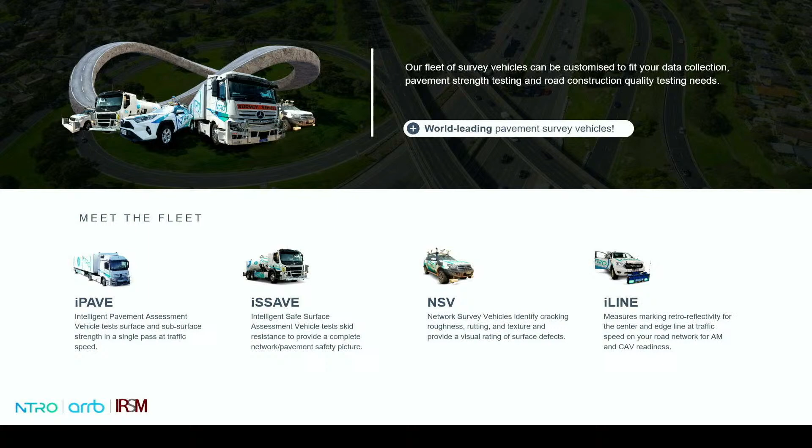The technological advancements that we have in Australia mentioned here today are the iPave, the iSSAVE, the NSV, and the iLine. I'm sure you've seen this dashboard earlier from my colleague's presentation, but we are able to provide our data in a way that is usable to the end user, however you need it processed.

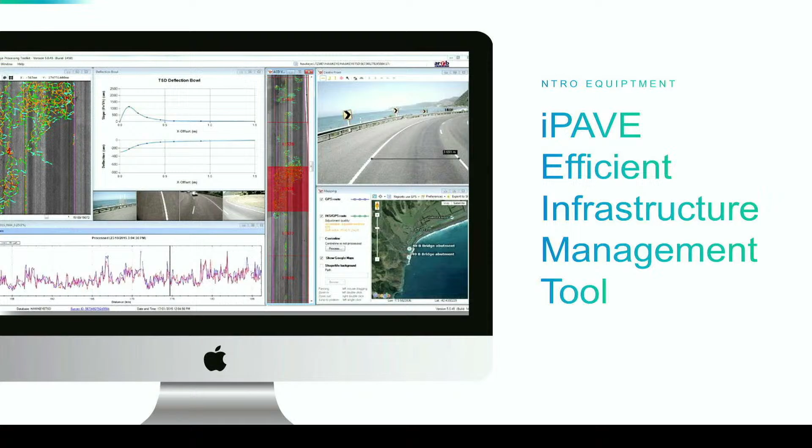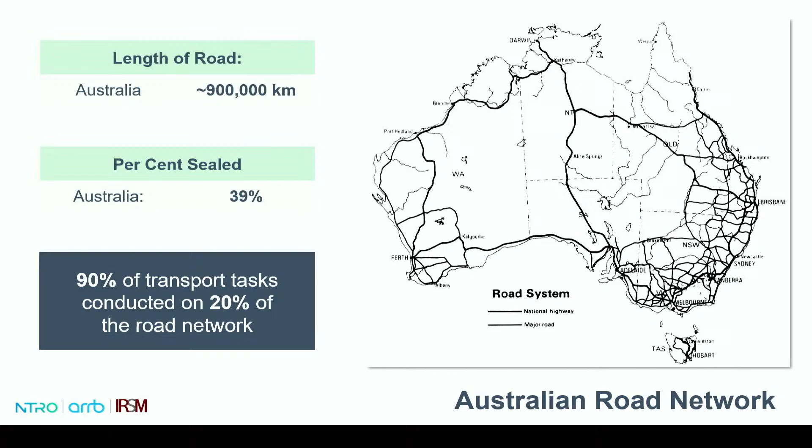The point of this case study is about right treatment, right place, and right time, because that is how you save money ultimately. There's no point applying a treatment that isn't needed or at the wrong place. So what does this all mean?

This is a case study from the Victorian floods in October 2022. This was a 1-in-200-year flooding event. I know it rains a lot more here in India, but it doesn't rain that often in Australia. This flooding event occurred in inner city Melbourne and the northern regions of Victoria. It was reported that over 500 homes were inundated, and the Victorian State Emergency Services issued over 169 major flood warnings from the 12th to the 17th of October.

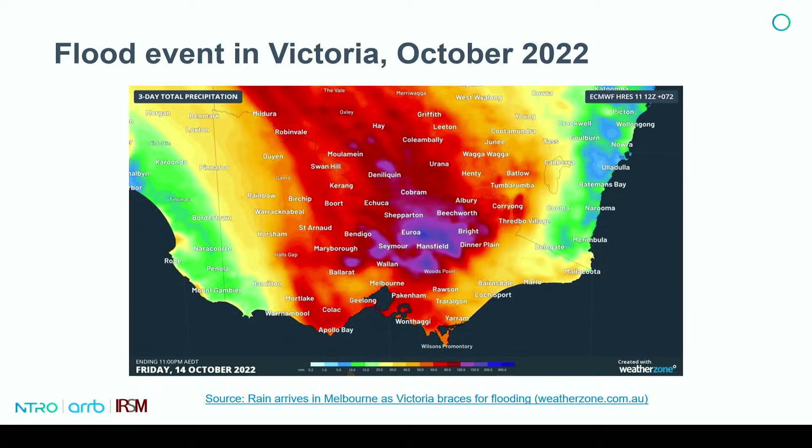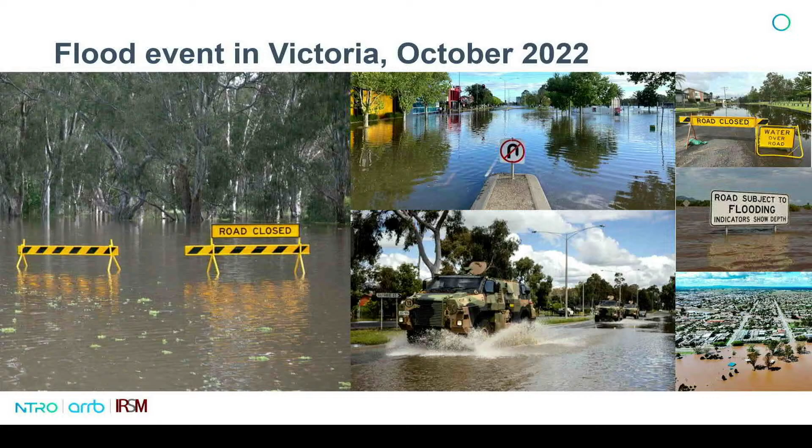This is what it looked like in Victoria, and we're not used to this amount of rain. This is what had happened to our roads and our networks. Once the water receded, this is the condition of our roads and our bridges.

Now, we did have road agencies carry out an audit of their state-managed roads, prioritizing the motorways and areas of critical safety for maintenance repair crews. However, that is only a temporary fix, because we have to wait until drier conditions before we are able to repair our roads.

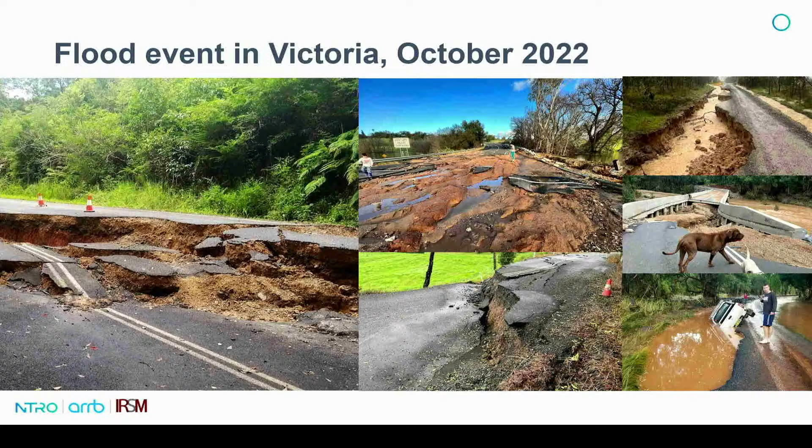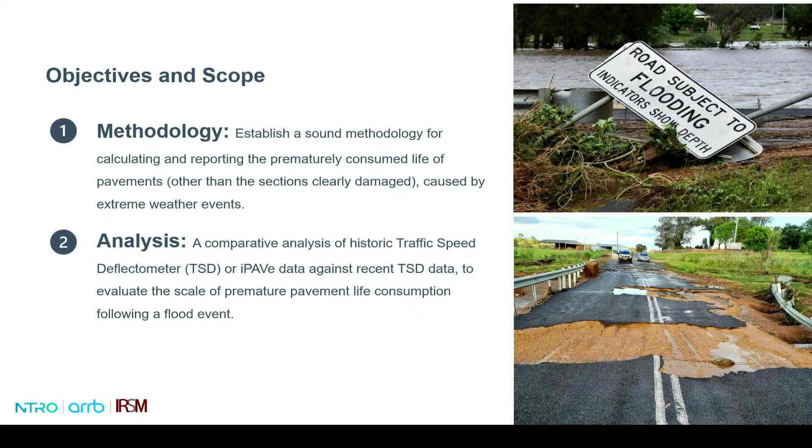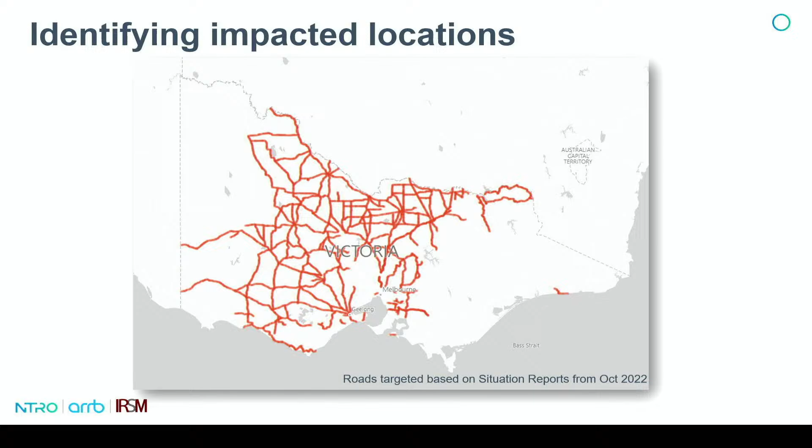The reason NTRO was asked to survey is that in 2021 we had already surveyed their network once, and in 2022, prior to the floods, we had also surveyed their network. Since then, the floods had happened, and in 2023 we were asked to resurvey.

What you can see here in the graph is that in 2021 the Victorian government provided $1 billion worth of maintenance, and they were able to increase their network from 2% good condition roads to 16%. However, after this flood event, they lost all of that, meaning there was a lack of resilience in the network.

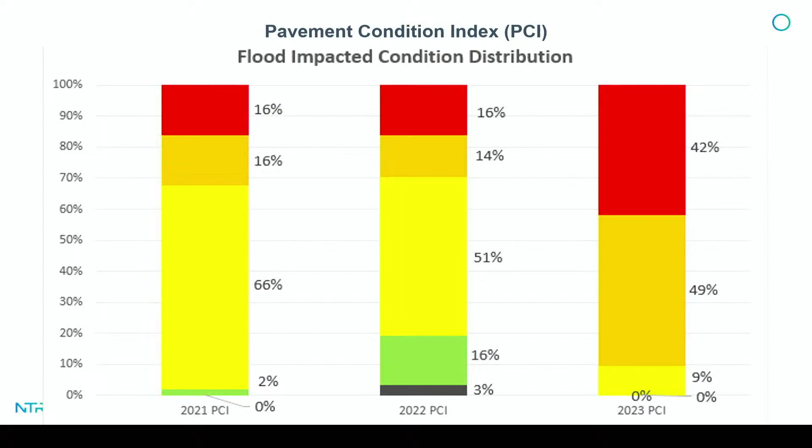So what did that mean? We were able to give them an assessment that indicated significant reductions in the remaining life. We analysed over 8,500 kilometres of road and matched 7,400 against previously tested data, then flagged 1,180 kilometres as deteriorated. That meant the cost for pavement intervention works was $291 million, and they were then able to request that from the federal government.

Another project we do with embracing big data is the Black Spur in Victoria. This is a very lovely picturesque drive that I've done many times myself, and as you can see, there are a lot of trees along the sides of the roads. Similar to some images we've seen today, these trees along the shoulders are nicknamed killer trees, because if you were to make impact with one, the tree will probably survive but you will not, and neither will your car. These are some of the incidents that have happened.

Again, using our survey methods, we are able to identify which trees are unsafe to have along the shoulders, and from there the road asset managers are able to remove those trees, making that road safer.

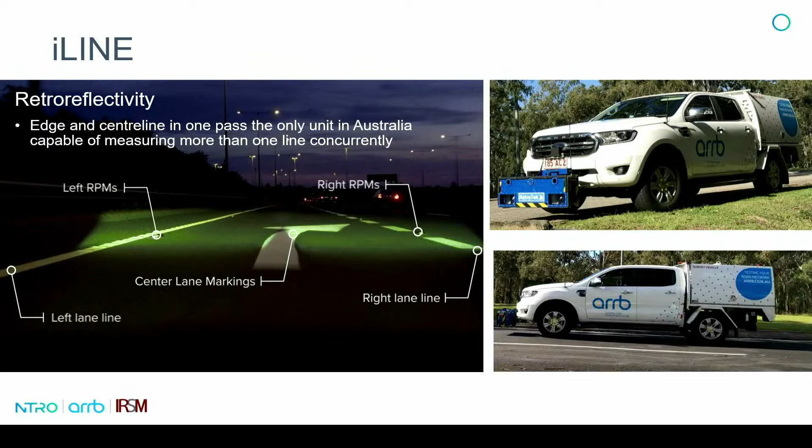We also wrote the guide from Austroads for harmonizing pavement markings and the national pavement marking specifications. We have a device called the iLINE that measures the retroreflectivity of these lines, which means state roads are able to only repair or remark areas that require markings.

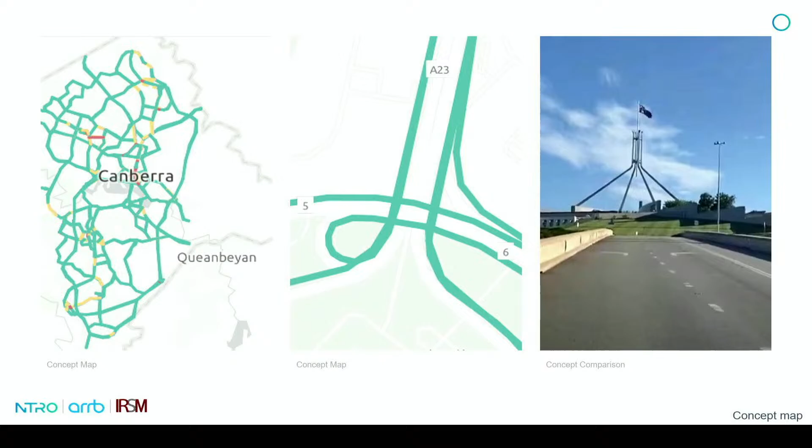But why all this data? It comes down to stacking that data. We've got a few platforms that NTRO offer, applying your safety data. If you notice a road that has lots of incidents and accidents, you're able to go into our other systems and compare that with the road condition, and ask why there are many accidents happening in that space.

From there you're able to see whether intervention is required, whether different maintenance is needed, whether we need to add a shoulder or change the line marking, and why these accidents are happening. This is why we need good quality data, to ensure that we are applying the right treatment, at the right time, in the right place.

One of the big reasons we are doing that in Australia is connected and automated transport. The future is coming, and through CCAT, another sub-brand of ours, line marking is really important for connected and autonomous vehicles. Without the lines, they can't drive themselves.

I know it is a little different here in India. I'm not quite sure how an autonomous vehicle will drive itself here - I'm afraid to drive here myself. But without line markings, autonomous vehicles are unable to drive themselves. They use LiDAR and need the retroreflectivity of the lines to be able to drive around, and if you don't have that, these cars aren't going to work. I know this isn't quite ready here in India yet, and I'm seeing a few smiles in the crowd who know I could not envision a robo-taxi driving around in India.

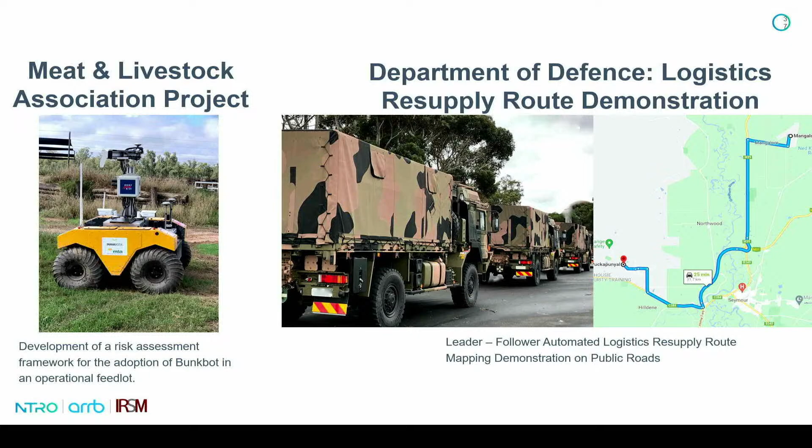The reason we are really pushing this agenda is for the successful transition into the future. I cannot stress enough how this investment into policy and how our roads are managed is incredibly important. We need good data, good governance to move forward, and to ensure, ignoring the connected and automated space, that our roads are safe, well managed, and that driving is a pleasurable experience. I'm sure everyone doesn't want to have to avoid a pothole every time they drive. It's already crazy enough here in India.

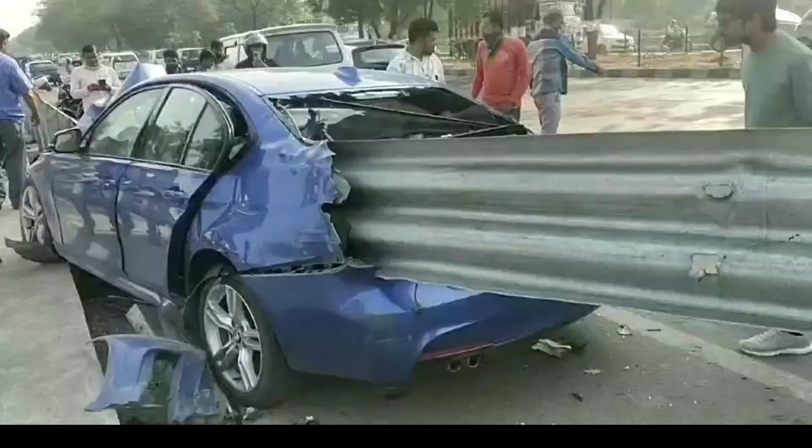That's a crash that took place in Tamil Nadu at an uncontrolled junction with side roads. There's another one where the crash barrier has gone into the vehicle.

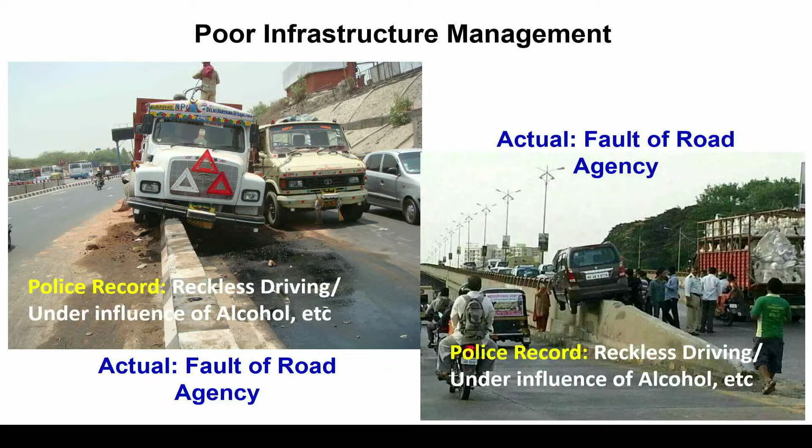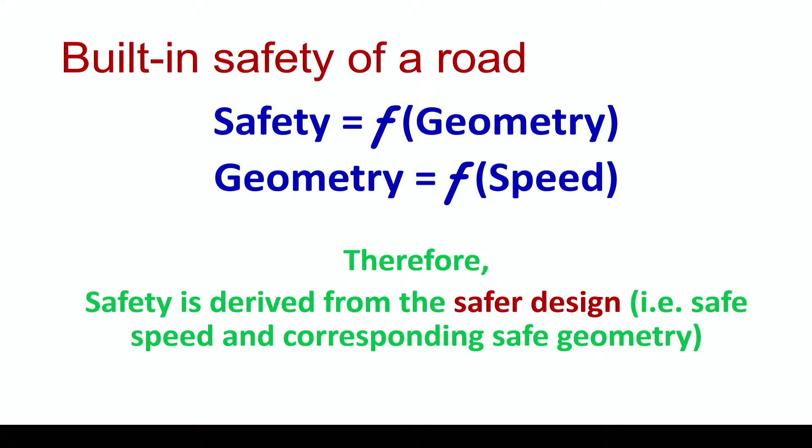There has to be infrastructure to compel drivers to reduce speed while going through the junction—raised intersection or other speed management devices should be put in, which were not there. So built-in safety of a road comes from geometry. It's a function of geometry, and geometry is a function of speed, we all know about that. So safety is to be derived from safe design; then only will it be safe. Otherwise, no safety.

Road safety experts and highway design engineers must understand one very important thing: safety can be built into the highway or road only if he or she understands that road safety is a blend of art and science. It is science because we have to use scientific principles to design the road—the super elevation, curve radius, everything based on science. And it is art because he must anticipate, he should understand how the road user is going to use this facility, what he is going to design. Unless he understands how road users are likely to use his design, he will make mistakes—he will make something, and people will make nonsense out of it. That's the problem.

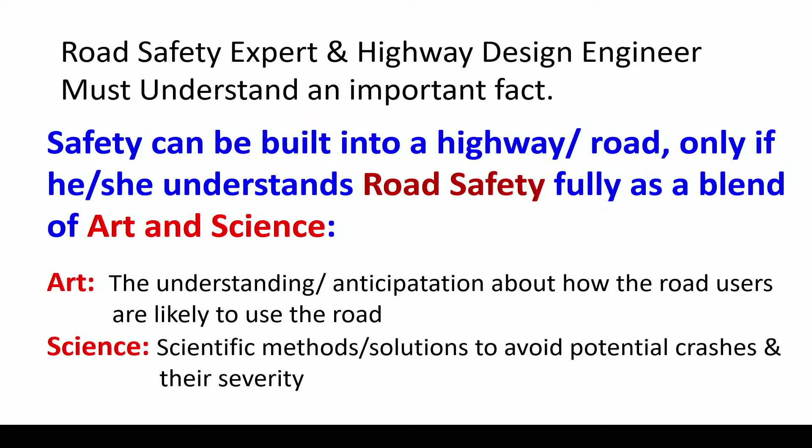Therefore, safety in design is to be provided by self-explaining roads, forgiving roadsides, by selecting the most desirable design standards which will be safe for road users, not by adopting minimum standards. All the standards and guidelines are the minimum that is required; safety requires more than that.

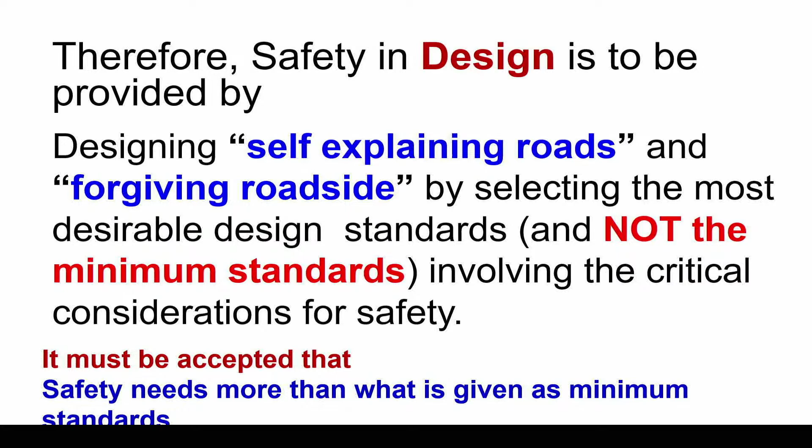Safety is not satisfied by this minimum requirement. It demands more than that. So we'll have to design it with all that. It must be accepted that safety needs more than what is given in the design standards.

Safe road infrastructure is to be designed safe. Firstly, safety engineering principles are to be adopted fully, considering what extra is required for safety. And then it should be audited during the development stages. All stages it is to be audited, not just an eye-wash audit by so-called auditors. It should be a truthful audit, fulfilling the objective and implementing the audit recommendations. Then only it will get to safety.

To be built as well as maintained safe. Not that we build only safe roads. Unless we maintain, it will be unsafe. It has to be maintained safe as well. And the existing facilities are used in an unsafe way only because they are not designed safe. It invites unsafe use. They are forced to use it in an unsafe way, or they are provoked to use it in an unsafe way, another way to say it.

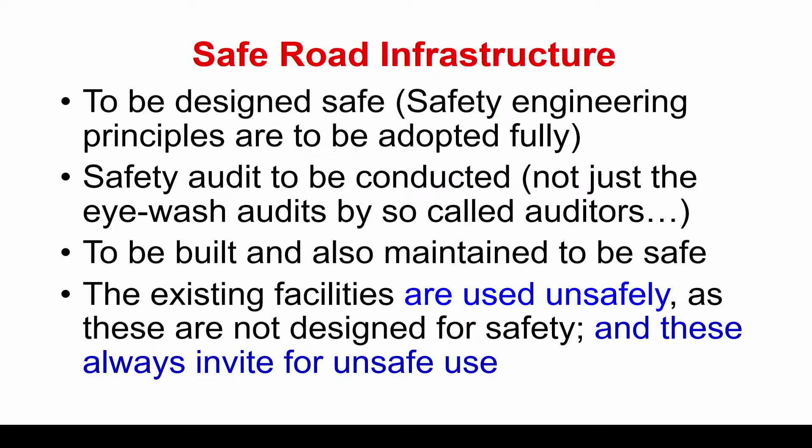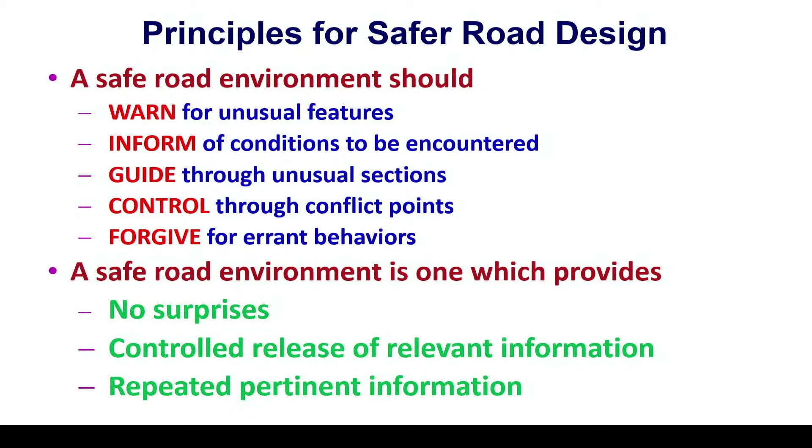Principles of safer road design, we all know. We have to warn, inform, guide, control, forgive. All that is known to all of us, and we must not leave any surprise for him. It must be told in advance, you are coming to a curve, you are approaching a junction. Everything must be told to him in advance. No surprise should be kept for him.

Reasons for poor safety in the road network are there. Design deficiencies surely. Poor road user behavior is another big question. And third is also weak enforcement. Of course, there are others which I have not listed here. The consequences are actually visible through our crash data year after year.

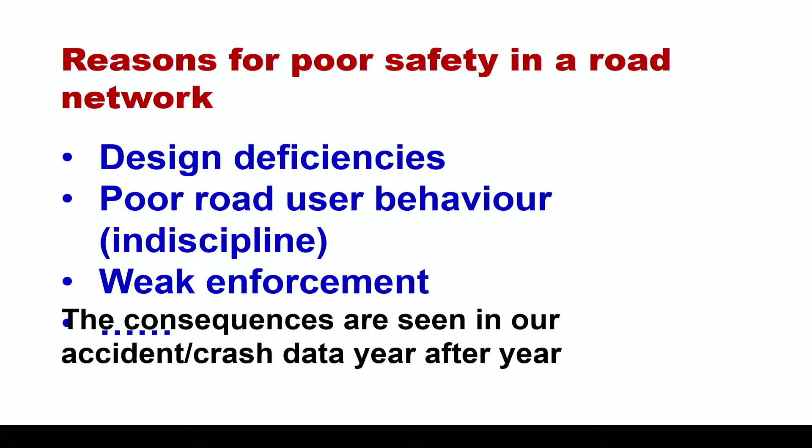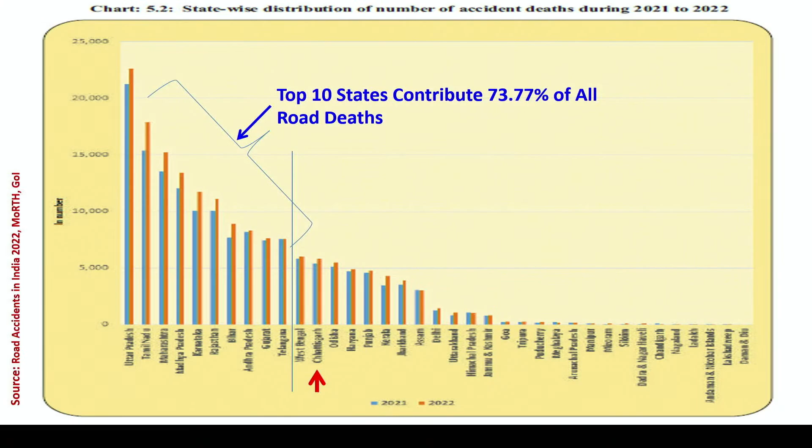The top 10 states who are really bad in road safety constitute 73, 74% of fatalities in the country. If we declare war on road safety in these 10 states, we will get relief by 74%. That's what is required. We are sitting in Chhattisgarh today, and that's what the arrow shows, the story of Chhattisgarh, which is not behind these 10. It's pretty close to the 10 states.

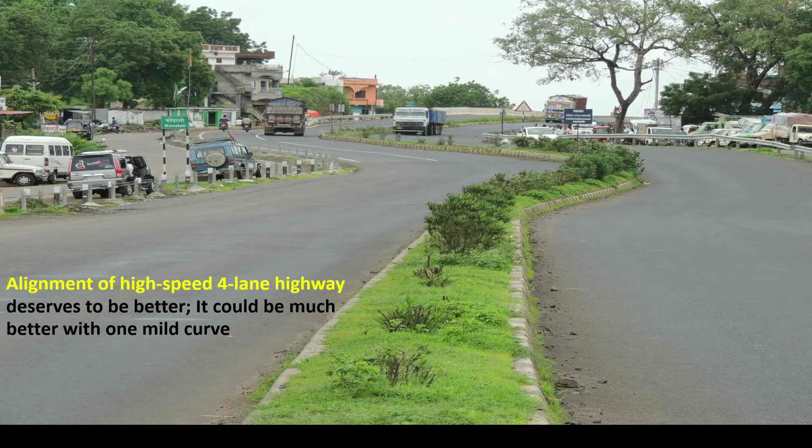Here is a 4-lane divided road. At the top there is a major bridge, and from there the road is coming down. How can a 4-lane road with 100 km/h design speed be designed like this?

My God, the huge number of people crossing a 4-lane, 5-lane road on one side. On the other side, again they will have to cross this many lanes. There is no overpass, no underpass. This is a serious, serious problem.

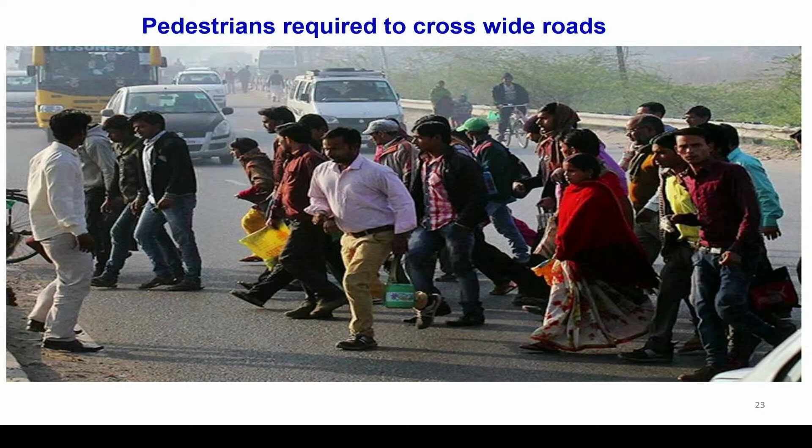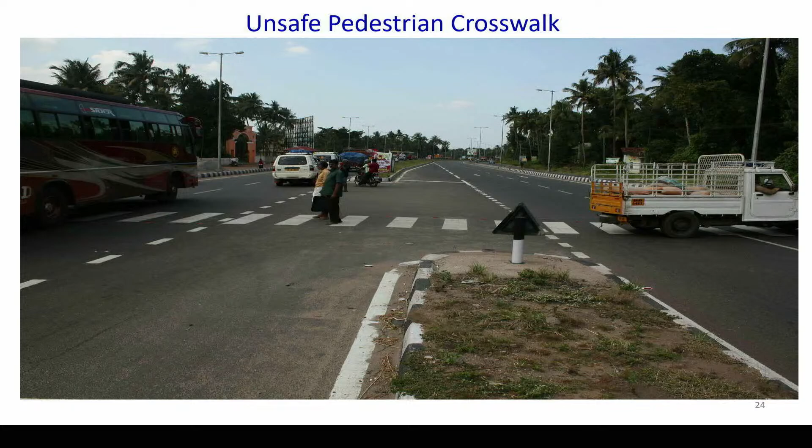Why the vulnerable road user percentage was 77%, you can understand from this figure. Look at this. Whoever painted it, painted in the middle of the junction. The pedestrian crosswalk is not painted there. It has to be here to give them the pedestrian refuge.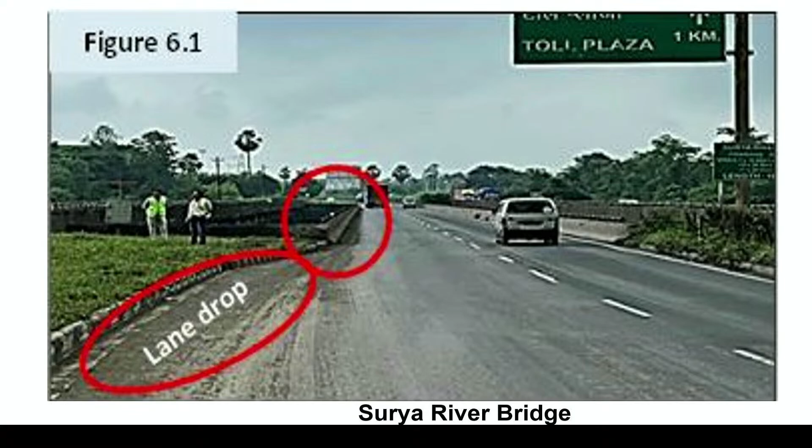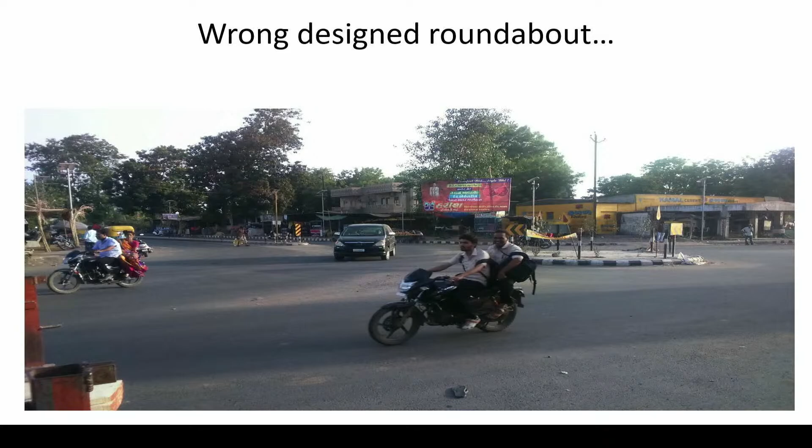This location is known to many of you, Surya River Bridge, the place where Cyrus Mistry met with an accident. Look at this roundabout, we are inviting him to go like that. Unless you design it right, he will make it easy for him, and that's what he's making. Look at this sign, where are the 6 lanes? I don't find 6 lanes.

That's not right. And above all these, there is road user behavior. I'll show you only a couple of examples. Look at this, 7 people on one motorcycle, and only one has a headgear. My God, they made it a 2-tier vehicle. Look at this, a horrible situation on a two-wheeler.

We can continue with these examples till tomorrow morning if you are ready through the night.

The Global Road Safety Facility said beautifully: money is going to be spent whether roads are built safe or not. If you make safe roads, it will cost more money. If you don't make safe roads, you will pay through the nose through accidents. India loses more than 10 lakh crore rupees every year through road crashes. Many development programs are deprived by this loss. We should always build safe roads.

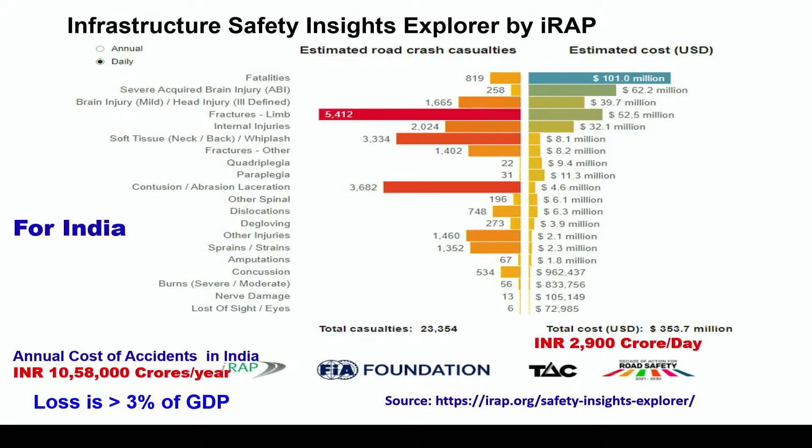National highways, state highways, and expressways account for two-thirds of all crashes and fatalities. There is a serious equity issue in road safety, as more than three-fourths of all casualties from road crashes are vulnerable road users. WHO said that life and health cannot be exchanged for any other benefits. We may say we are providing them mobility and accessibility, but by giving that, you cannot take their lives. That's not permitted.

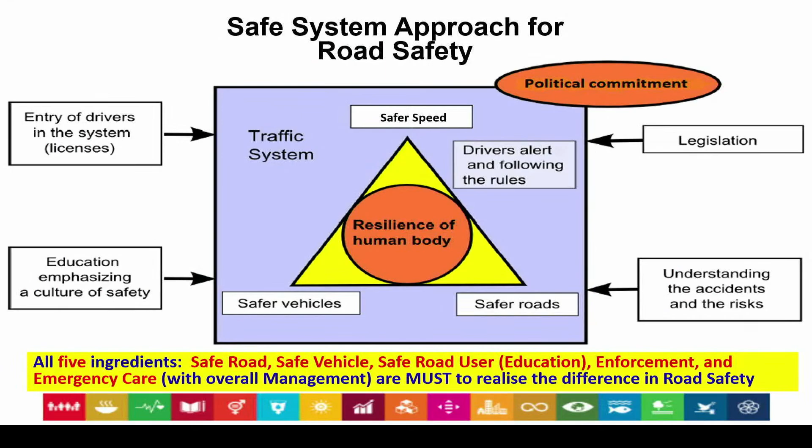For systematically improving road safety, we will need a safe systems approach. Without safe systems, nothing will happen. That's the safe systems approach. Most of you probably know, so I'll not go through that. That's another way to show the safe systems approach.

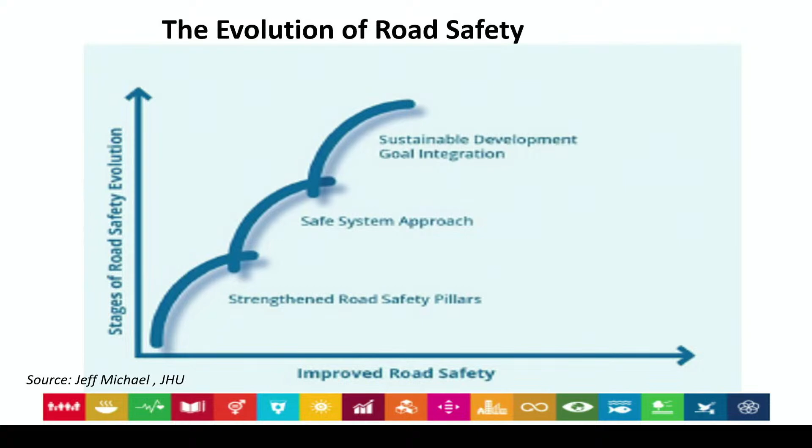Now, this is very interesting. Johns Hopkins University did research on the evolution of road safety, and they said that to have the safe systems approach, you will have to strengthen the road safety pillars first. You should have road safety management capacity. Without that, you cannot go to safe systems approach. These 5 E's are required, and only then will you get road safety.

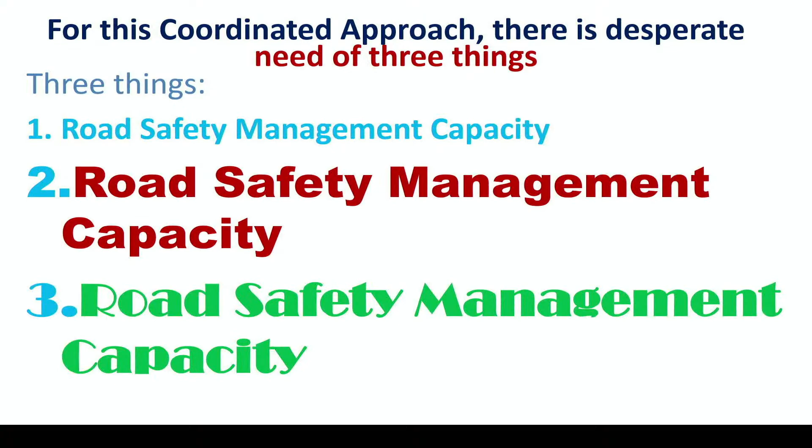Together, they will provide it. That's why for a coordinated approach, there is desperate need of 3 things. First, road safety management capacity. Second, bigger road safety management capacity. And third, even bigger road safety management capacity is required.

Why is road safety not improving in India? A road safety board was recommended by the Sundar Committee in 2007-08. It is not implemented till date. Cabinet has already approved it, but it should be like a separate ministry with a separate budget line, with independent budget. Everything for road safety is to be handled by that board in a coordinated way, including emergency response. Not that road design will be one thing and emergency response something else. They have to do it in a coordinated way, and only then.

So like that, everything else is there. There is no result-oriented program till date because this coordinating body is not there. There are many other reasons listed here. There is a road safety action plan which is to be implemented, but probably very few are interested in that.

This is a situation: an elderly couple died on the Yamuna Expressway, a 160-kilometer long expressway from Delhi to Agra. Two people died, one survived with major injuries. Hundreds of such accidents occur. This is an accident at night time where a truck is parked on the lane itself of the expressway, and a motor vehicle, a car, hit it, went inside it, below it, and 2 people died, one survived.

Now, hundreds of such accidents occur all over the country, day after day, for several years. Nothing has changed till date. My suggestion: exemplary punishment is required for offenders. Only then will it change.

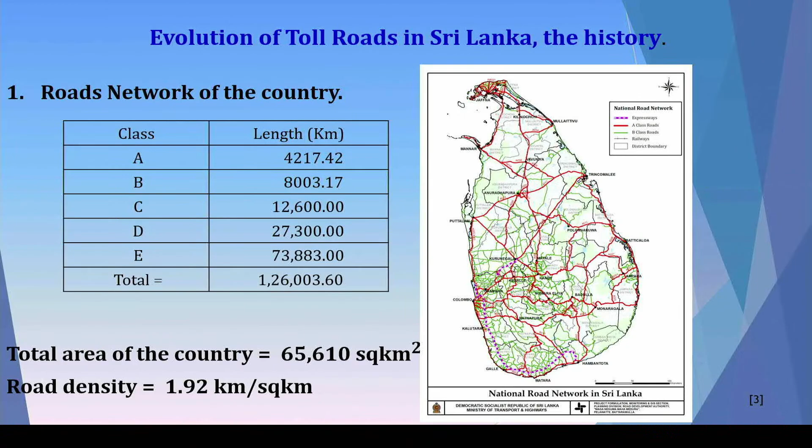The main design philosophy of the transport planning was to keep Colombo as the center and to design the roads, the expressways, radially outward from the center of the capital.

So coming back to the main point, the E03 was the one expressway about 27 kilometers. Why did we select that one? That's the only expressway that connects Colombo and the international airport.

So we selected that expressway, and initially it was MTC, meaning it had a manual toll collection method - very obvious. Then we did a calculation, and we recognized that unless we had at least one electronic gate by 2014, the manual gate wouldn't be able to cater to the traffic demand, and it would create unnecessary queue lengths.

The design calculation, though I didn't include it here - those slides I skipped - I am summarizing. So eventually, in June 2015, we decided to introduce one electronic gate to each and every plaza, keeping the others manual. One electronic gate is able to cater for 1,110 vehicles per hour, while in our manual experience it was around 290 vehicles per hour.

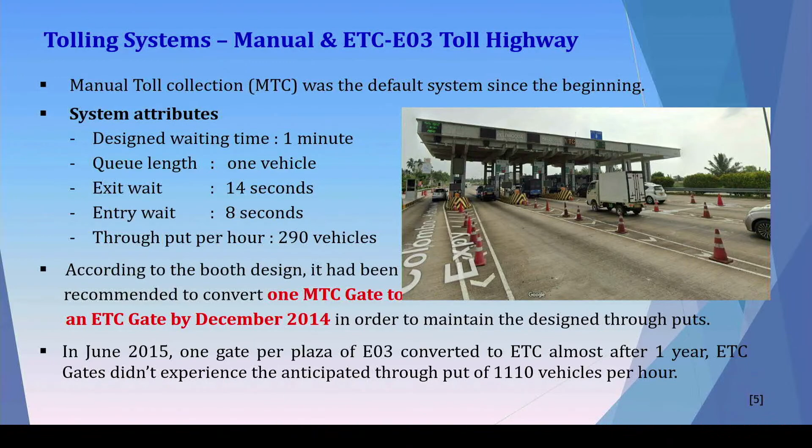What really happened when we introduced the electronic toll system in 2015: up to 2016, about 12 months, it was very enthusiastic for the users, they were very interested. In the first, second, third month we went up to 850 vehicles per month in registration. But in 2017 you can see it came down to 470 vehicles, and in 2019 it was only 17.8 percent out of the total users of that particular expressway.

So though we introduced electronic toll in the design office, in reality the situation we observed was totally different. What happened was the ETC gates were under capacity - really accommodating only about 25% of the capacity.

So eventually, that's why we decided there is a problem. We thought, the existing growth prediction models had been unable to address the issue, so we asked what shall we do. What you can see in the picture is the total queue, but the ETC gates are under capacity. So we decided to explore the decision-influencing variables.

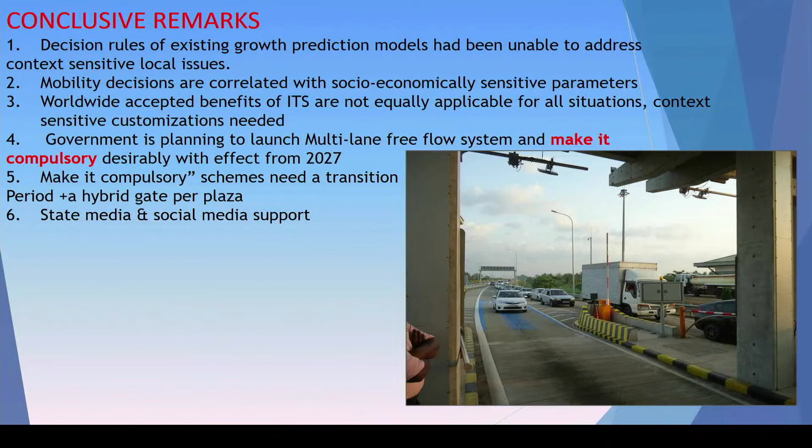Making it compulsory needs a transition period, plus a hybrid gate per plaza, and social media and state media support to keep people knowledgeable about the system. This is a very socio-economic thing that was not in the literature, but we have to consider those things.

Thank you. Thank you, sir. Thank you very much.

Sir, what you have highlighted actually happens in our country and all developing countries. Initially when you start this PPP model and start collecting toll, these are teething troubles. We have faced that in India also, which you are facing, but there is a silver lining. People slowly realize that it is for the betterment, and they slowly adopt this. Another thing I'd like to share: I'm dealing with a lot of projects in neighboring countries, like in Africa, where the development of roads is required much more than, let's say, in India. But funds are not there and still PPP projects have not started.

They are mostly dependent on World Bank funding, ADB, African Development Bank. But slowly they have started realizing that the PPP model has to be adopted in all our developing countries. Otherwise, it is not possible to bring funds from the central government or the treasury to develop these roads. In India, in the last 25 years or so, it has been a success story in PPP projects. So don't lose heart, sir, in your country also it will be a success story.

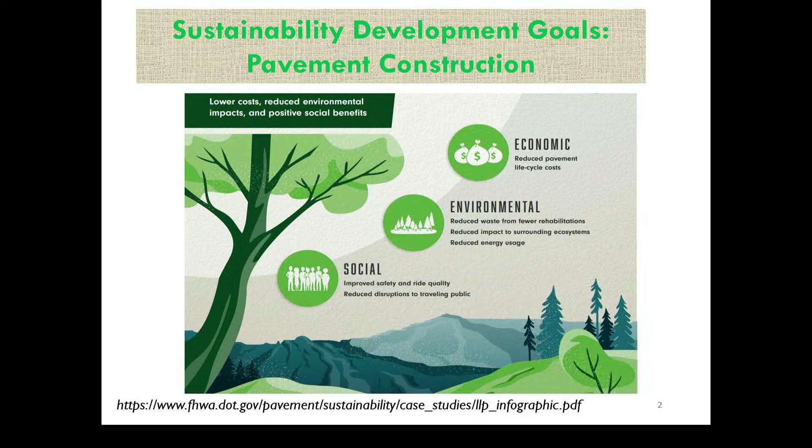We are talking about sustainability, and when we talk about that, in my personal opinion, this particular word is a buzzword in the construction field. Because when you talk about the technologies and practices, everybody says we have to have the sustainable approach. But you know what are the limitations? What kind of challenges are you going to see?

Now see the first thing here: in many parts of India, and I can give examples, there are no aggregates available at all. Either you have to bring them maybe around 100 or 200 kilometers away, or you have to have a completely different approach. So this is the big challenge that we have been facing right now.

Second thing is, we keep comparing ourselves and think we have to adopt guidelines from other countries and implement them as they are. But remember, the kind of traffic, the climatic conditions, plus the construction practices we have been following, what kind of quality, what kind of construction practices we are following, it's completely different. So we need to be very, very careful about that.

Other thing is premature failures. In spite of following all kinds of guidelines and excellent designs as per the mathematical calculations, in spite of that, you see a lot of failures coming up. So it means there is something different we have to think about, and this is what we are going to talk about - what exactly we need to do differently.

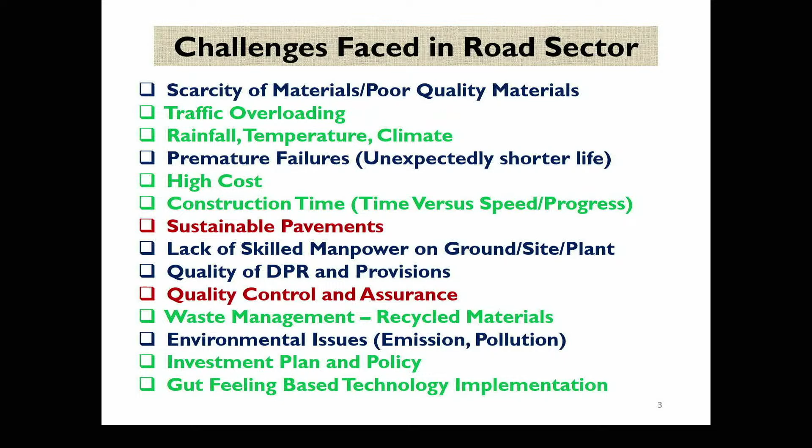So these are the basic issues that we are facing. When we talk about quality, we also see this kind of photographs. We see the failures. Somebody says bituminous pavements are good, somebody says concrete pavements are good, but we have seen both pavements failing quickly, sometimes within a couple of years, sometimes within a couple of months. So if you construct a new road and this happens, it means the approach is not sustainable.

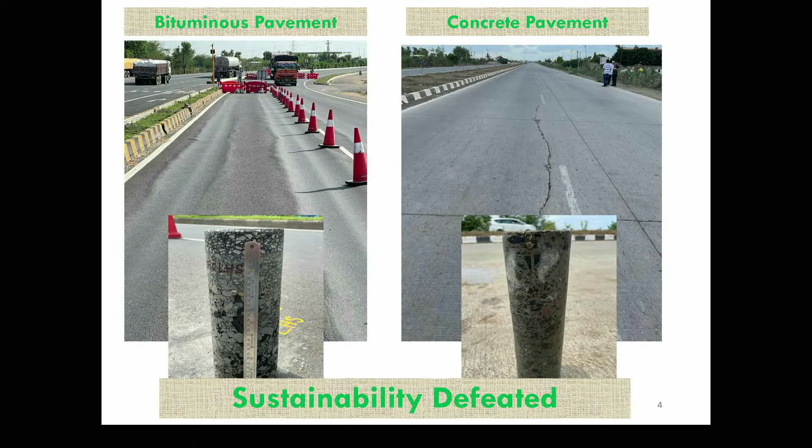We keep on constructing things, and you can keep on seeing the photographs. This is the bituminous pavement - see the beautiful diagrams of the potholes coming up, how it is going to go. See the concrete pavement also at the same time. It's not like the failure is happening to a certain kind of pavement - it's all kinds of pavement that we have been talking about.

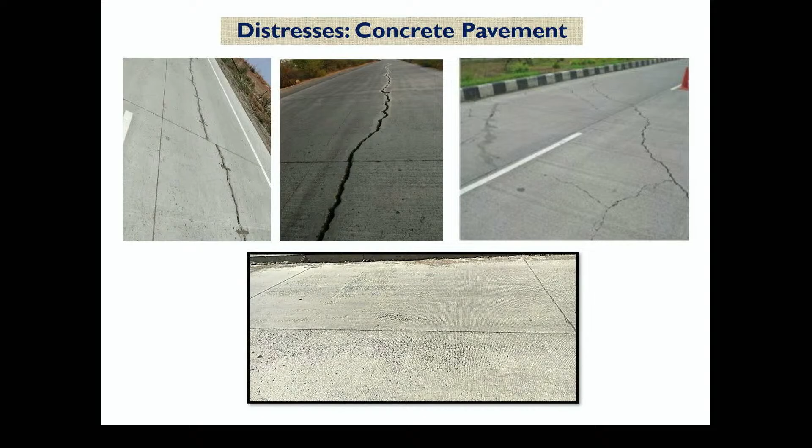Now the immediate thought comes, what happened actually, and what kind of solution can we find. I have seen the tendency among industry people that if it is a bituminous pavement, do the milling, do the overlay, job is done. Again distresses come, again you do the same thing, again keep on doing it. But concrete pavements are much more difficult - either you keep it as is, whatever is going on, or you keep on suffering yourself. We have so many examples where we have really struggled to maintain the road networks.

So this is the problem - what we are doing right now, a lot of failures are coming up. We have been designing pavements, sometimes very uneconomical pavements also. We need to be innovative in our approach. It's not necessary that whatever other people are doing somewhere in the world, we have to really follow the same. You can think of something different altogether.

We have also seen, in fact all the practitioners are here, sometimes unrealistic data has been assumed. For example, the traffic - in the beginning somebody is assuming the vehicle damage factor is around 4 or 5. But when the road is constructed and it fails, suddenly the same agency comes and says that the VDF or vehicle damage factor has gone maybe to 15, that's supposed to be there. It means you have not done the homework correctly. There has to be a certain approach that we adopt, how do we take care of that.

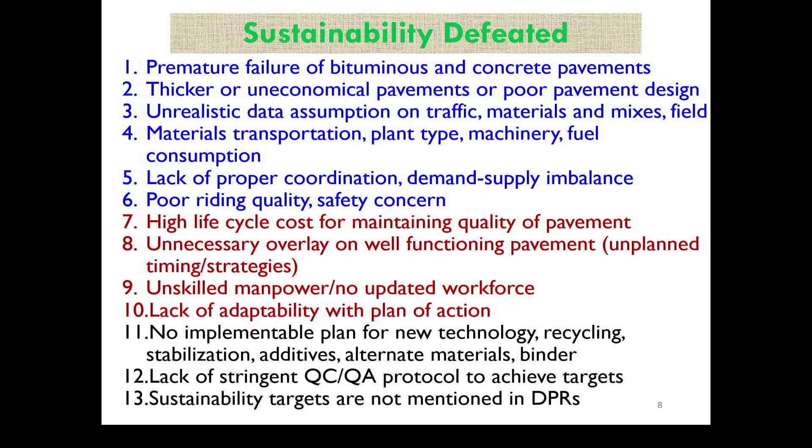Sometimes the overlay design - I will show you a couple of examples later on, what kind of things are there, new technologies, what we have been doing in India and what can be done. Just think about that. I will show you examples of both bituminous pavement as well as concrete pavement.

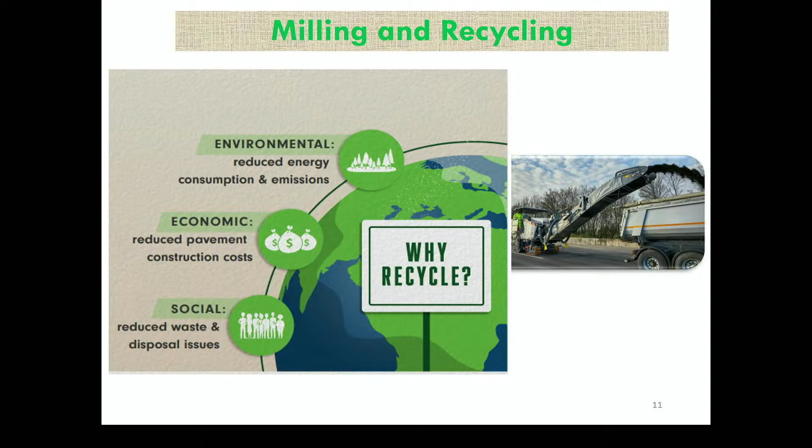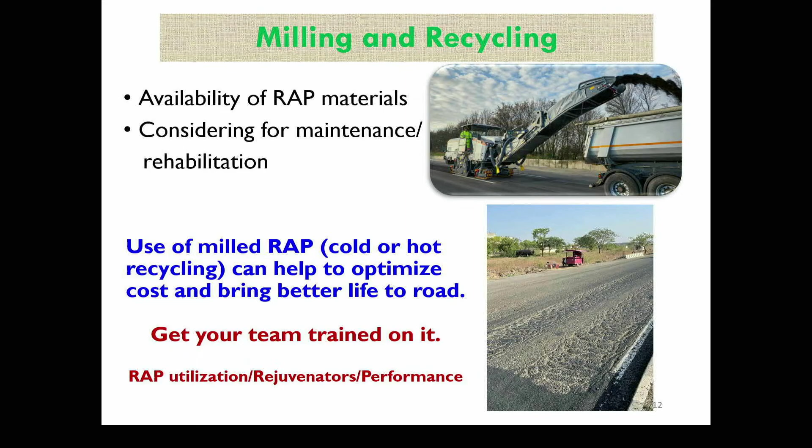Let's talk about first technologies, milling and recycling. This is happening on many projects, and I am a strong supporter of this particular technology. You need to think about whether it is cold recycling or hot recycling, and find out what is most appropriate for your project. We have seen many contractors or agencies very afraid of doing this because they are not trained on it, and sometimes not confident they will really get the quality. But these practices are there all over the world, so we have to think about that.

Second thing, you have to think about pavement preservation techniques. Many projects are happening nowadays where overlay, micro surfacing, and thin overlay are coming up. We need innovative solutions, whether certain thin layers or something else. Right pavement, right time, by right people - it's not about any pavement, any technique, by anybody. So you need to do your homework on what you can think about.

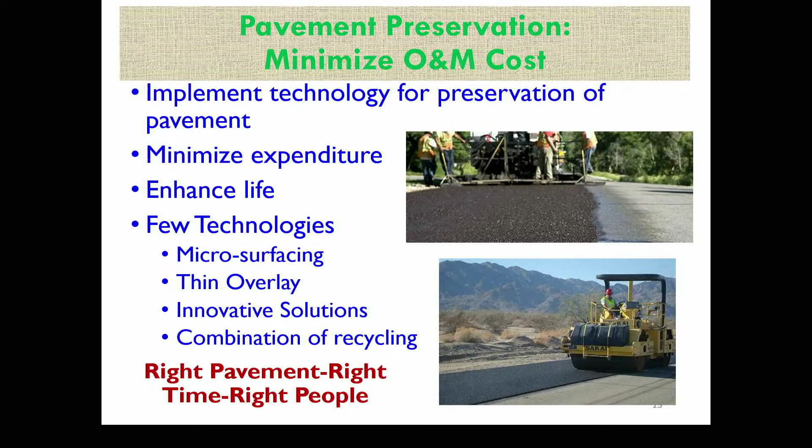Now let's talk about different materials happening in India. It's not like I'm just showing you that it can be done - we are already doing all these kinds of works. For example, polymer modified binders. Some people are talking about hybrid binders, crumb rubber modified binders or hybrid crumb rubber modified binders. Waste plastic is also there. The whole purpose is we want something which can survive at least 10 to 15 years, or minimize the cost that we keep incurring every couple of years. That is the whole purpose.

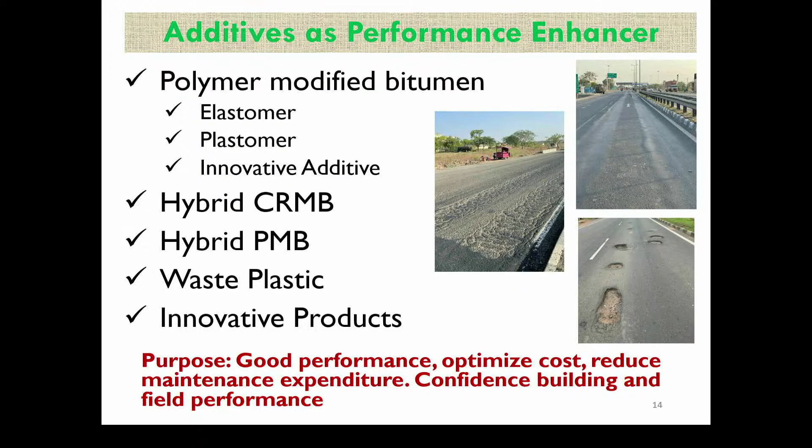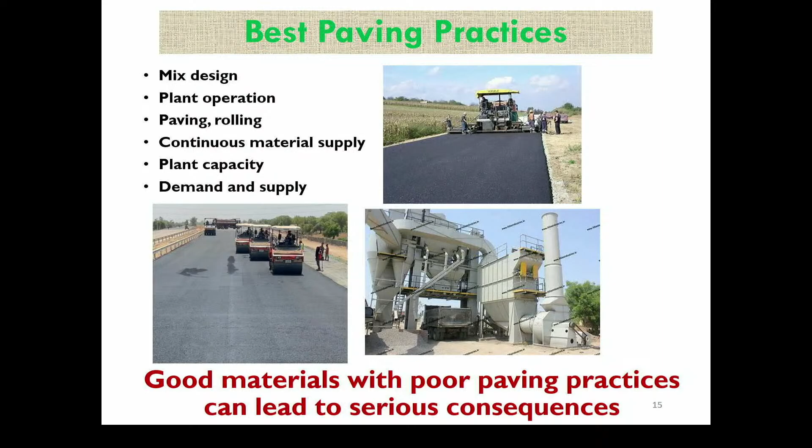Material is one side, machinery is one side, but paving practice is the other side. What kind of practices are we following in the field? How are you constructing? How is your team trained? You have good materials, good design, good machineries, but if your paving practices are not correct, definitely nothing is going to work out. So you need to really think about what kind of paving practices we have to follow.

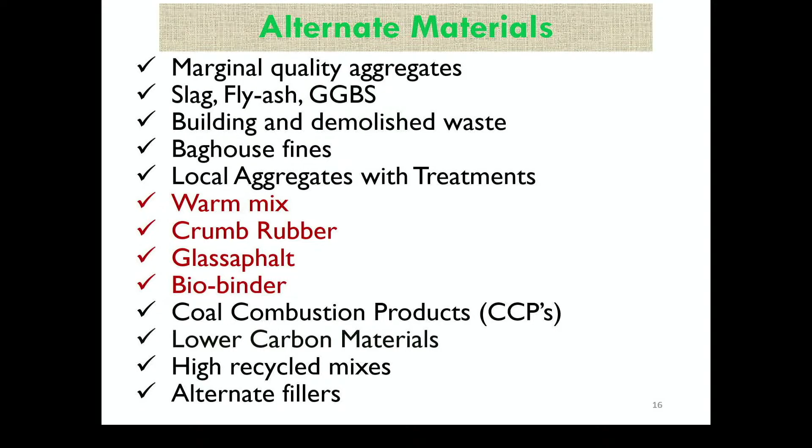Alternate materials - a lot of alternate materials have come into the market now. People are really exploring what kind of alternate material we can think about. For example, biobinder is there, slag is there, or fly ash, GGBS. In fact, we are going to talk about that.

New pavement design - this is what I really wanted to focus on. Sometimes I have seen industry people who don't want you to deviate from whatever is happening. I usually encourage thinking unconventional sometimes, because that can help us. We have not done it doesn't mean it will not work. We have to find our local solutions, what problems we have been facing, and what we have been learning from our failures.

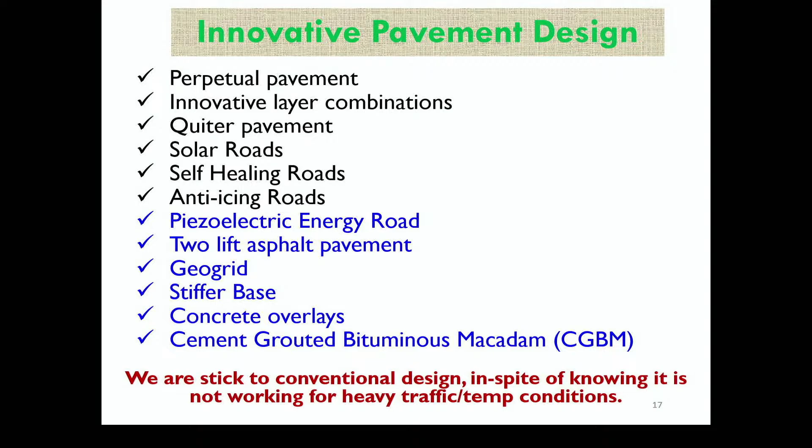Perpetual pavement, innovative designs, new combinations - what kind of new designs can we do. Many presentations were there in this particular hall during the last couple of days covering many things. I will not go into detail on all these.

Certain new advancement is also coming up. For example, people are talking about recycling, stabilization. Can we do stabilization for the concrete pavement? Can we do rehabilitation techniques for the concrete pavement? What kind of technique do we have to use? What kind of technological aid do we have to apply? For example, GPR is there, intelligent compaction is also there. I think these are going to help us, but at the same time we have to be capable of handling them properly. Otherwise, you will keep generating data, keep putting it somewhere, and things will keep going in a different direction.

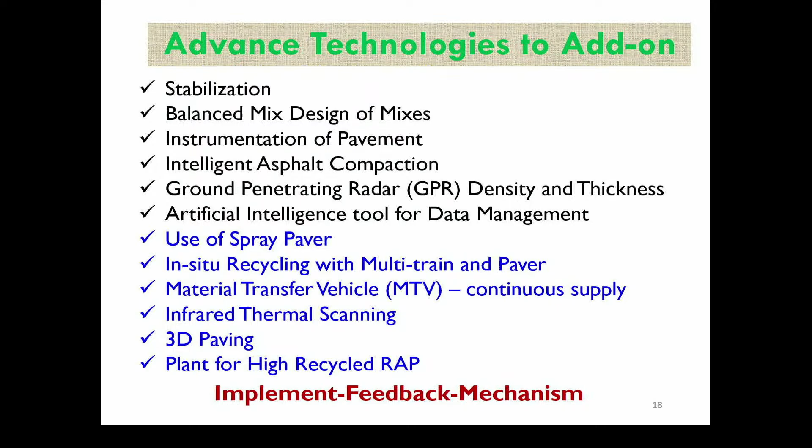Now let's talk about concrete pavement. Remember, I don't know if you do the calculation of water consumption for concrete pavement, and in areas where there is no water. Remember in the beginning I talked to you about aggregates - think about the water also at the same time. If you calculate water consumption for concrete pavement, from production to curing, and then cutting and all, there is huge production and high consumption of water. You need to think of something alternative. What can be done? How do I cut that down? What kind of technique can we use? What kind of fuel can I use for the production?

In fact, in the exhibition also, I saw alternate material for the dowel bars, for the tie bars, that has not been tried yet on many projects.

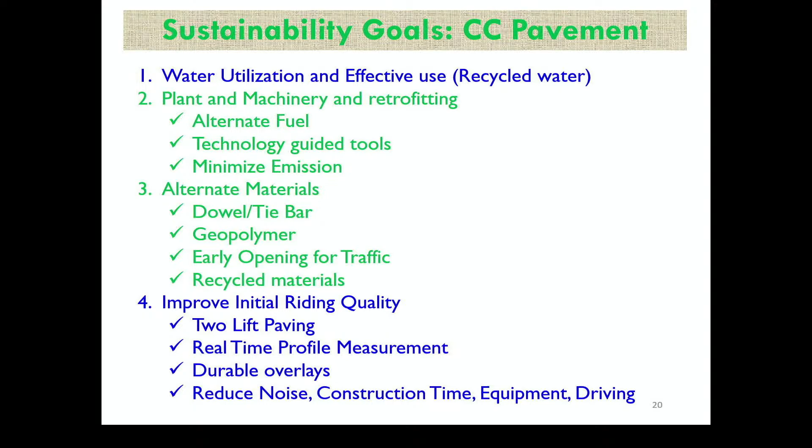Can we think about early opening to the traffic? We have seen many agencies want early opening to the traffic. They don't want you to wait 21 days or even 2 days. In fact, for city traffic, you need to do curing for maybe hardly 2 days. How do I do that? What kind of approaches can we utilize to think about this? Many other new techniques are also there that you can think about.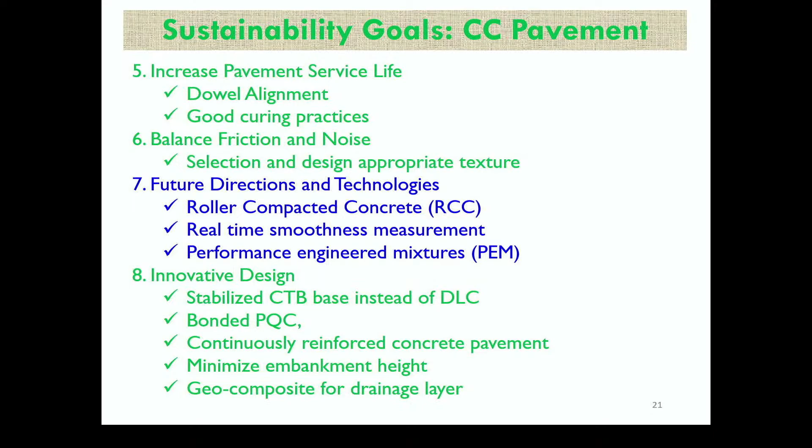New development is also there in the area of concrete pavement. I saw a couple of presentations on what kind of innovation we can think about. How do I rehabilitate the concrete pavement? This has become a major challenge for us now. Many concrete pavement highways require certain kind of overlays. Whether I can put bituminous overlays, or concrete overlays, or leave it as is. That's what we need to think about.

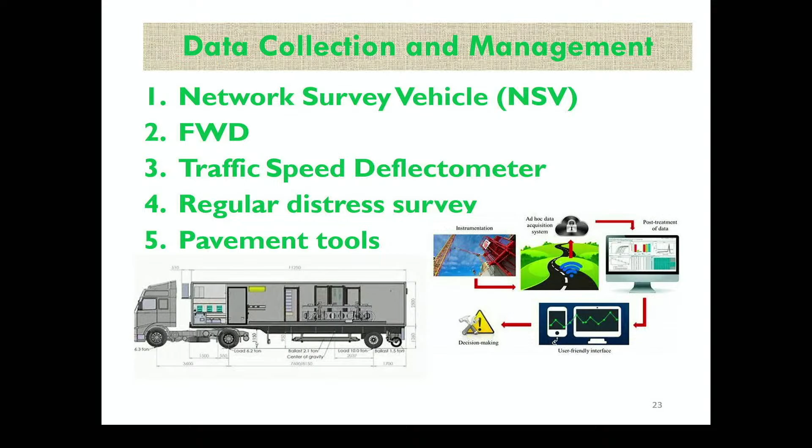Then comes data collection. One of the presenters also showed data collection, the NSV, the falling weight deflectometer. We have been collecting huge data right now. How do we utilize them? What kind of mechanism do we follow for better management of the road network? And the last couple of slides cover training and tools.

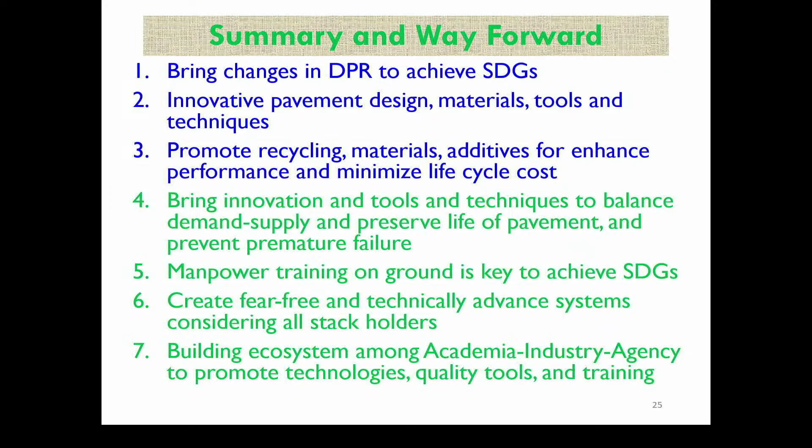Please emphasize your people to get trained, get up to date about this. What kind of things are happening all around? The world is changing, technologies are changing, so you need to think about what can be done. You need to bring certain changes in your DPR, because I find that document very, very valuable. You have to have a lot of things built into the DPR itself.

This is the last slide, and I find it quite interesting that whatever technology or advancement you are thinking about, make sure you understand the technology. I can give you multiple examples where technology was adopted, it failed, and a bad name was given to the technology. Nobody follows that again ever. Technology is not bad - the question is how do I utilize it?

Recycling, stabilization, perpetual pavement, PMB, CRMB - a lot of things are there. Understand that, provide technical support, training, collect data. We have seen people implement the technology and then forget about it. Please retrain your network, bring it back, and then go forward.

I think this is what has been happening, and I'm happy to know that many things are happening in India, good as well as bad. Both are happening, but I am very hopeful that in the future we are moving in the right direction. I see many people here who are already involved in doing a lot of innovative work. With that, thank you very much and I appreciate your patience.

Thank you, Professor. I think you have touched on a very important thing, but let me share with you that in recent times, all the contracts give this option to contractors and concessionaires to use innovative designs and advanced technologies.